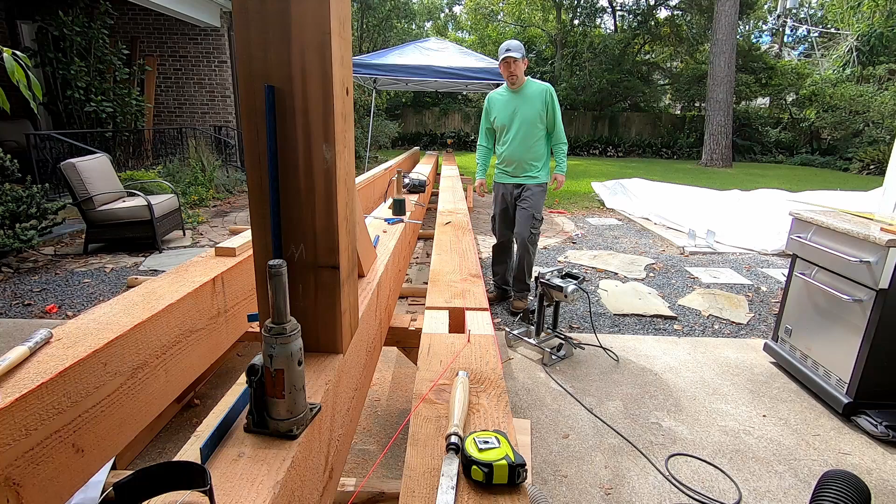I don't know if you can see it, but this plate has a fairly significant bow in it. And what I'm worried about is these braces on both sides that are going to connect to the post need to be in the right location, or the post will twist, in my opinion, when I go to try to connect it on both sides.

So I ran this string. A lot of people just do a chalk line down the other end, and am lining up my mortises. Normally I would come 3 inches off what should be the reference face for the start of each of these mortise holes. For the post I have a 2-inch mortise, and for the braces I have 1.5 inches.

And like I said, I would come 3 inches off of this reference face in. But because I've got a bow, 3 inches off this particular edge of the board is not as far in as I need to be to line up with this.

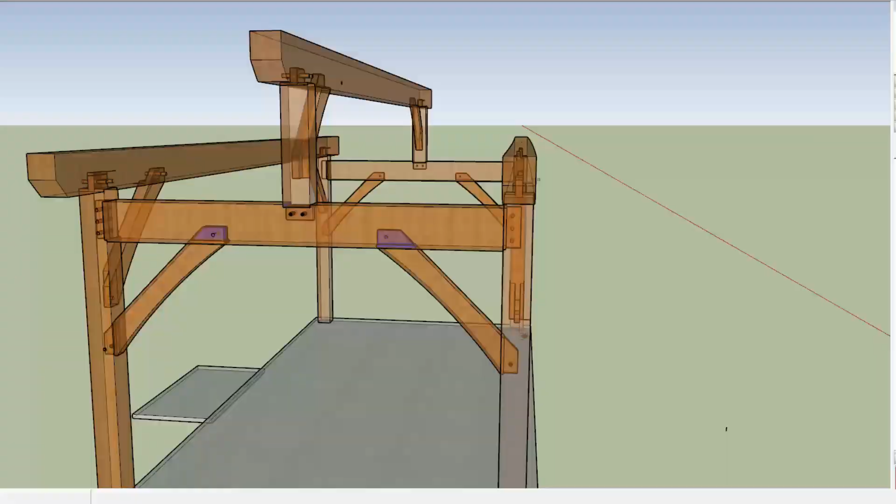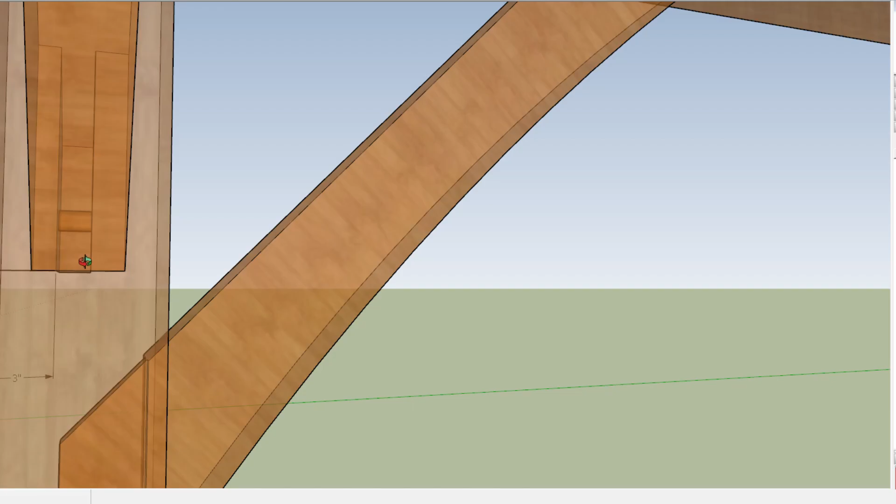So quickly, here's what I'm talking about. I modeled it in SketchUp. Here's the plate with a 5/8 inch bow in it. And so I normally come 3 inches off of the reference face. So 3 inches off here is where this mortise hole would start, and then 3 inches off of this face would be where this starts.

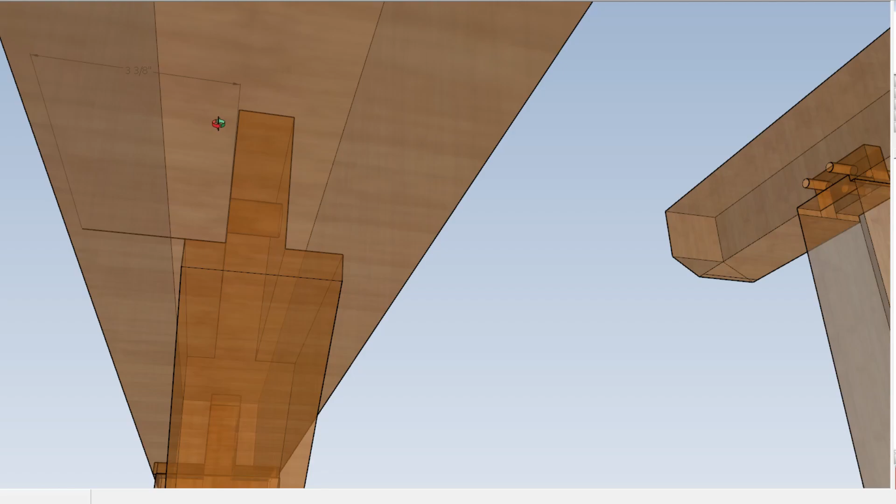But as you can see, that's actually 3 3/8 inches, and that's why I needed that string to determine it. If I had come 3 inches off, then my mortise would have started here, and I would have had significant pressure on this trying to get this tenon to move 3/8 of an inch to the left. Who knows what would have happened.

My new reference face for this becomes this string right there, or if it was a chalk line, then it would be the chalk line. So this is the first time I've done this. I've tried to use the square rule method this whole time. When you get irregular timbers like this, all bets are off, and you've got to go to either faking the square rule with something like this, or scribing, or whatever else.

So I hope it turns out I know what I'm doing. We're going to find out. But I thought I'd show you guys what I did.